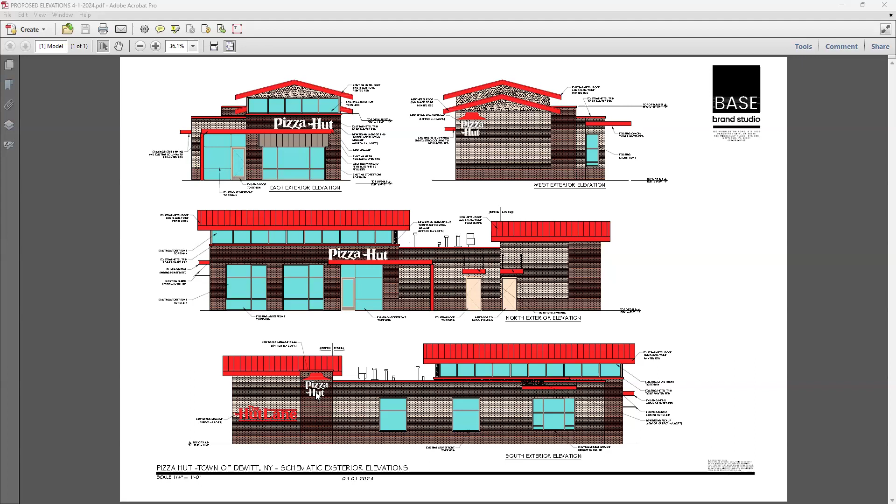So it would have to fit within that same square footage. That's not a problem, but do you guys have what the actual size is for that? Yes. Okay, yeah, we'll definitely match the square footage. We might be smaller or larger, we'll get it back to whatever size they are.

John, can you zoom in on the bottom left? For Brett, we're trying to see what all that red stuff is on the wall there. Keep going down, the Hut Lane. Is that a new sign? It's like a stipple, it's not necessarily a sign, it's more of a...

They just got... it's a sign. Yeah, well, yeah, technically it's a sign, yes. But it doesn't have to be there, if you wish. Well, if we need to, we can both remove it, Pizza Hut can, and Hut Lane, are new signs technically. Correct. Yeah, you know.

Those were not on the other plan, neither were on the other. Everything to the left of the Pizza Hut vertical band, that Pizza Hut vertical band to the left, is all new anyway. That's the new addition.

But the variance would allow them to have the same Jimmy John size sign on that south elevation. They're just moving into the addition, but then breaking it into two signs. It doubt that's a lot of square footage, I'm sure that's not correct, but I will look at that. If the square footage is too much, then we'll just knock it down to whatever we need to knock it down to.

Well, there's that, and then the difference between one and two. Right now, Jimmy John's is one sign, now you have the Hut Lane and Pizza Hut, unless you stack them together as one element, so read as one sign.

Well, the Hut Lane, you have to be careful about, now we're getting into logo and non-identification signs. We can look at the signage, but if you're uncomfortable with that, we have no objection with removing the Hut Lane. It's not an identifying sign. My gut says the Hut Lane's gonna go away, it's Pizza Hut sign.

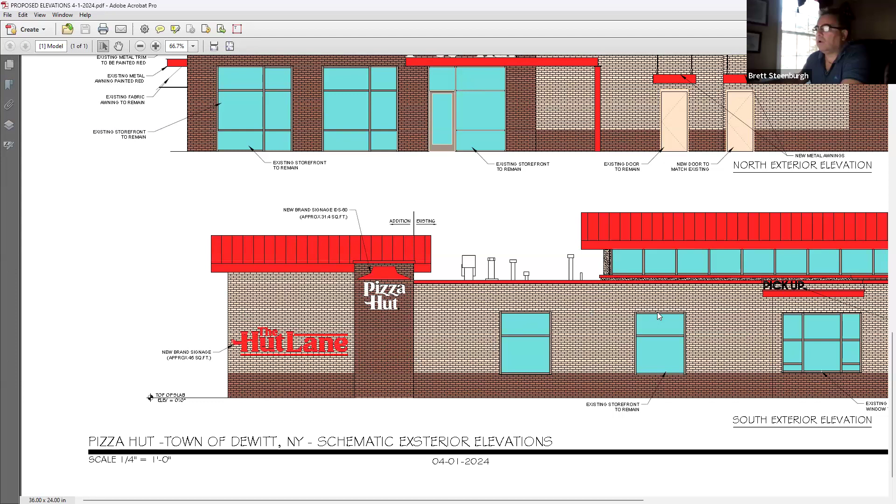So are we good on the signage on the north elevation? The reason I bring that up is because that doesn't face a roadway, and the code states the sign... but there is an existing Jimmy John sign on that north elevation as well. I just want to make sure that's what's in the variance. If it was approved as part of the variance, then you'd have the ability to put a sign on the north side of the building, but it would have to match the location.

If you get those square footages, we'll make sure we match those sizes. Now, Pizza Hut does have kind of standard sizes -- if we're slightly smaller, is that okay, or are we wanting it exactly the same or close to? That's fine, smaller is fine. I just know they have this proportion to their signage, so we just don't want to be bigger. Got it.

I just want to verify because I want to get the variance application in for the area variance as soon as possible, so we wanted to include that if it was necessary. We have a setback. Oh, let's do a setback. Yes, I didn't get that in. I said we could recommend it this week, but we have another meeting, right? That's what I was trying to figure out before. Do you have the site plan available? Yes, I do.

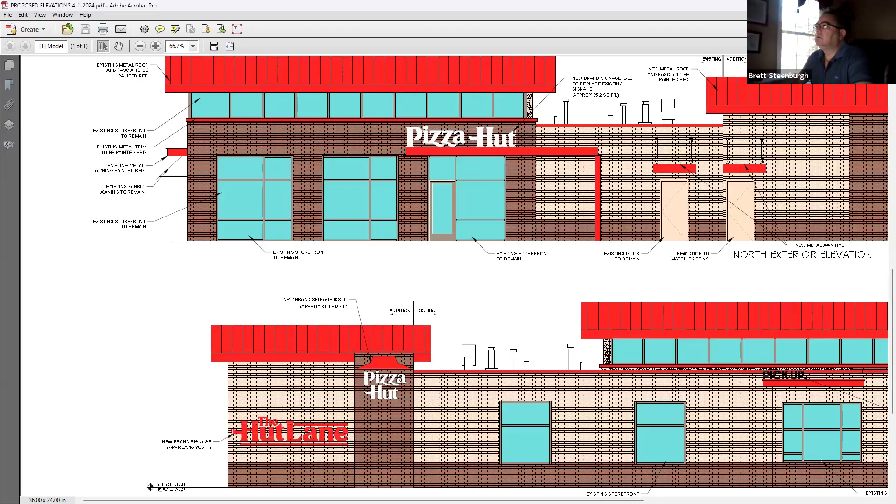Actually, hang on one minute, let me... It's an AutoCAD format, so the colors are going to be a little off. Then what we want to look at is certainly placement of the transformer, what your strategy is for that, the screen, how you're gonna manage that one. I guess nothing's changed in terms of the size of the addition and setback requirement -- no, all of that is the same. Just give me one second here.

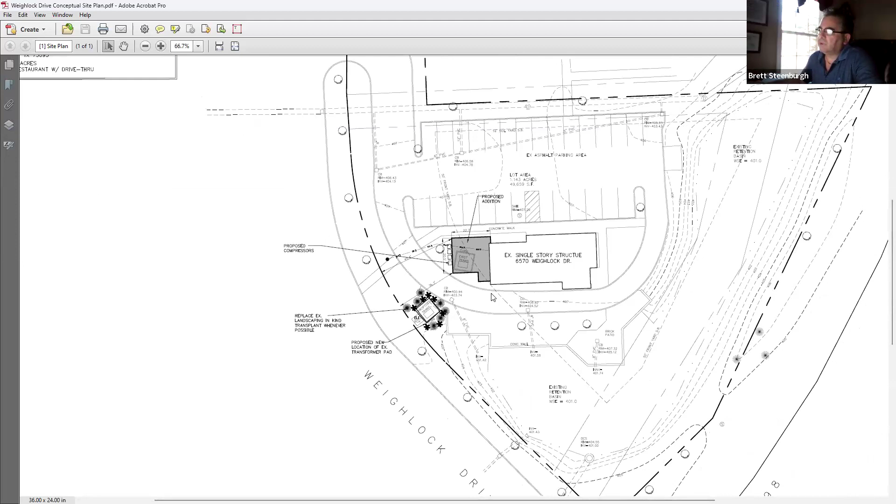transformer, which needs to be relocated, and move it over next to the existing electrical box along Weighlock Drive. I don't have any objection to that.

The only unfortunate thing is there's a lot of mature screening and landscaping that's grown up around that electrical box since, that will have to be replanted and relocated if possible. I'm going to step out there later today and take an inventory of what's there to see what can be relocated and replanted, or what we have to replace, and get an actual landscaping plan around that proposed transformer location.

We like this approach. So your intent is to screen it with vegetation versus an actual screen, right? With vegetation, similar to what you see around that existing electrical box now.